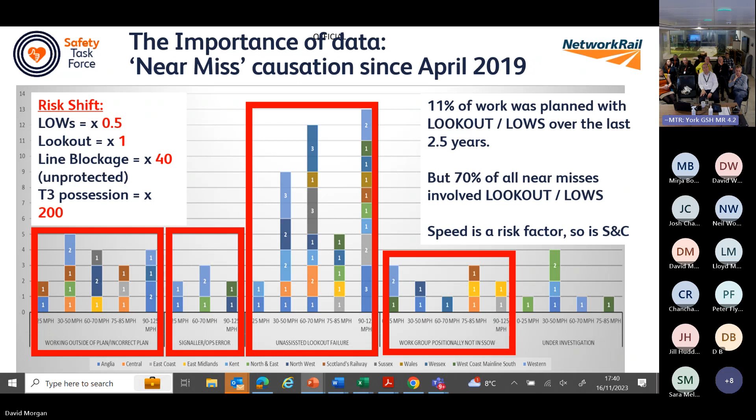11% of work was planned with lookouts over the last 2.5 years, and you'll see a change of how that's changed over the last few years under the programme that I've been involved in.

But this slide actually is probably one of the most important. I'm going to talk about track worker safety systems and the programme of what we've put into place, technology-wise, etc. But this is actually the most important slide that I've got, and it's to remove the need to be there in the first place. So whether that be we don't do it at all, or we do it less frequently, or we do it in a different way using technology.

So, for example, PLPR, plain line pattern recognition. We do the majority of our basic visual inspections on the East Coast Main Line, apart from S&C, by PLPR now. And then eddy current testing, we don't have to do the ultrasonic testing that we used to do manually for that, etc. So risk-based maintenance in all disciplines and how we do the right thing in the right place at the right time.

At the moment, we've been trialing use of drone technology, and I can see Joe's on the call there. Joe's our technology lead for train-borne and airborne inspection regimes. So we've proved the concept of doing S&C inspections by drone in York Section, and we're going to push to doing 3 out of 4 of our inspections of S&C using drones. There's the 153 coming online, which is a train-borne inspection for S&C as well.

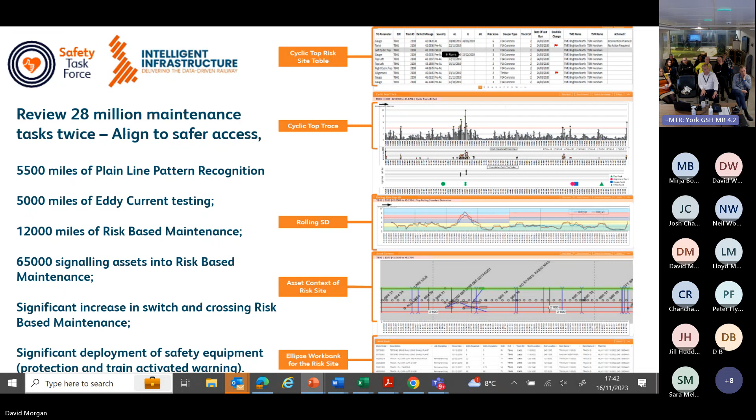So again, taking away the physical need to go and put boots on ballast is the most important thing. When I was given the track worker safety job and I liaised with Rob McIntosh as our regional director, he said, I want you to focus as much as you can on removing the need to be there in the first place.

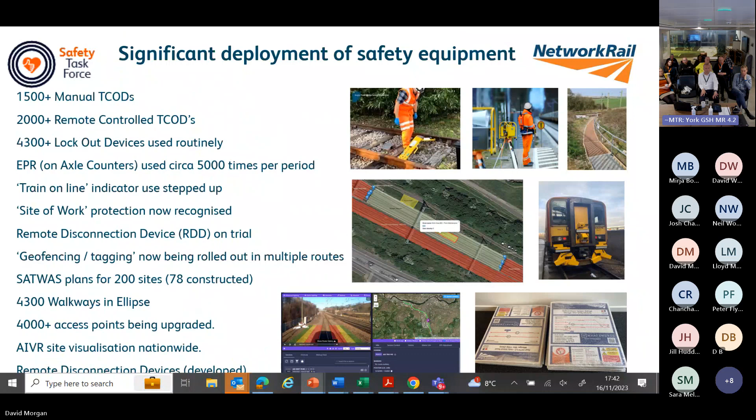So significant deployment of safety equipment through the time of the safety task force, and these are national numbers, deployed 1,500 plus manual TCODs, remote control TCODs, lockout devices, EPR, train online. There's a whole suite of things there, and I'm going to talk about them a bit later on about what those individual things are. So bear with me, and I'll tell you what they are.

But I refer back to the slide I talked about before about how many accidents were involved in the use of unassisted lookouts. So red zone working, as we call it, but be careful because we still do open line working, by the way. So SATWAS and TAWS and ATWAS are methods that you can work in an open line with trains running. So unassisted lookout working is where we had someone with a flag and a whistle that looked for trains, and when a train was coming, told their mates, there's a train coming, blew the whistle, get off. We started that in Victorian eras.

Just a question. So you said you've got 25% of the work, but 80% of the accidents associated with that work. Is that correct? So 20% of the accidents were not lookout related. That was situational awareness. I've got a slide a bit later on that shows a breakdown and a bit more detail on that. But 100 years ago, 120 years ago, that's how we warned our workforce of our trains coming. And in 2019, still over 25% of our work was done unassisted lookout. So that's where the 25% bit is, and you'll see the accident breakdown.

But the graph, as you can see, we have minimal amounts of unassisted lookout now. And the little bit of red that you can see on the bottom right map of the UK there was some of ours down at Peterborough. But since Chris Harrison went to Peterborough as the IMDM quite recently, we've almost eliminated unassisted lookout at Peterborough in the last 2 months as well.

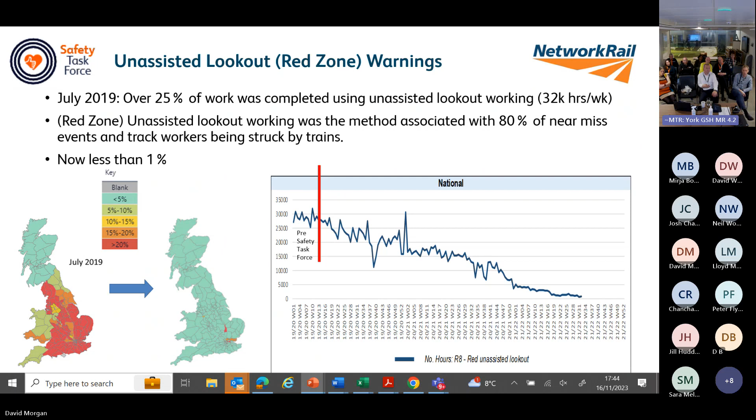And on East Coast Route, I'll speak for East Coast Route itself, we were at something like 12% additional protection on our line blockages. And by that is a belt and braces kind. So if the signaller makes a human error, you've got something else in place that protects. I've had to try and sell that to the signalling fraternity that this is not additional work for them. It's actually helping them not make a mistake.

And something Richard Owens used to say to us quite regularly in the early days when we were trying to push additional protection is that I wouldn't want somebody to make a mistake, kill one of their colleagues, and then have that on their mind for the rest of their lives. And you can imagine what that would feel like if it's your responsibility that you've made a mistake and somebody's been killed. So now on East Coast Route, we're at about 67–70% of our line blockages taken with additional protection. And I'll touch on some of the additional protection stuff shortly.

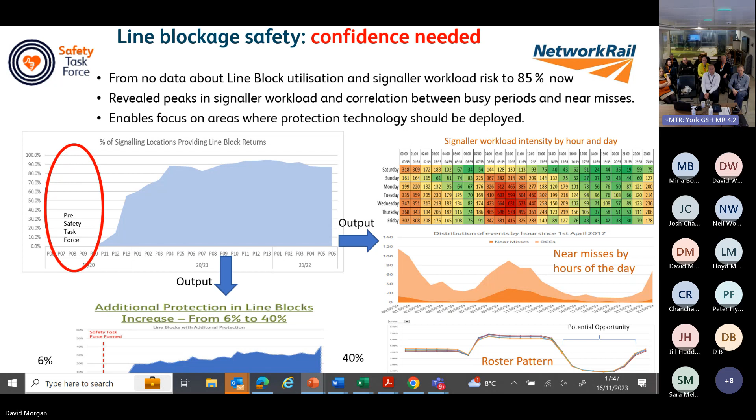Causation factors. I've got a couple of slides because there's other technology involved other than just the stuff for the track worker safety, which I'll come on to. Simplifying the 019 standard, what we're doing with COSS recertification. It used to be an online kind of thing, and our safety critical competences need to be assessed in a more rigorous way. So that's now back to classroom assessment. And funnily enough, we had quite a higher failure rate than we were having previously, where everybody was just doing it as part of their online assessments.

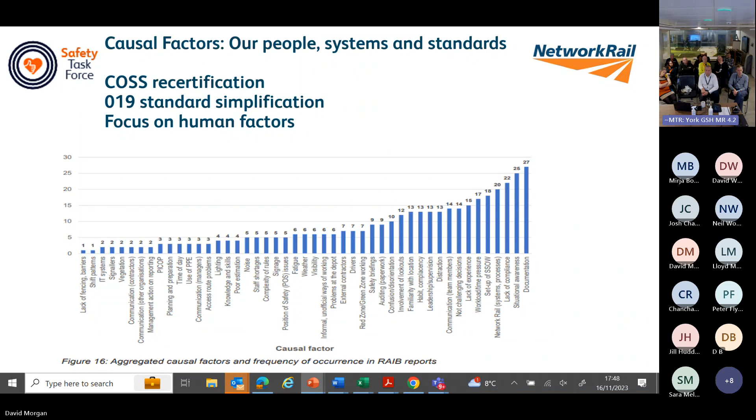There's a reason for that. I could pass something to my son who's never worked on the railway, give him a few books and he could pass that test. That can't be the way that we do safety critical competences. And then we've got some focus on human factors. So we've been doing things around IOS training, risk interpretation, all that kind of stuff. Lifting the skill level of our soft skills when you're a PIC or a COSS on any line, what responsibilities you've got.

So Rail Hub, and funnily enough, I am the route lead for the rollout of Rail Hub as well. This is an online system that does safe system of work. So it replaces the paper-based system. We get everything electronically, goes from PIC and planner, the section manager, and a check-in process, and everybody can do it electronically and remotely. But there's also the assurance and the check-in facility so we can look at what people are doing and how they're doing it more rigorously.

And we've successfully deployed that across the whole country now. Yeah, there's still a few teething issues with it. If you're an on-call section manager or engineer, in the early days you got lots of phone calls about the pack doesn't work, this doesn't, but we've ironed most of that out now. There's still an odd thing that comes up.

Could I just ask Paul to turn his camera off? That's okay. Paul, you've just popped up in the top right of the recording. I'm not sure you want a starring role.

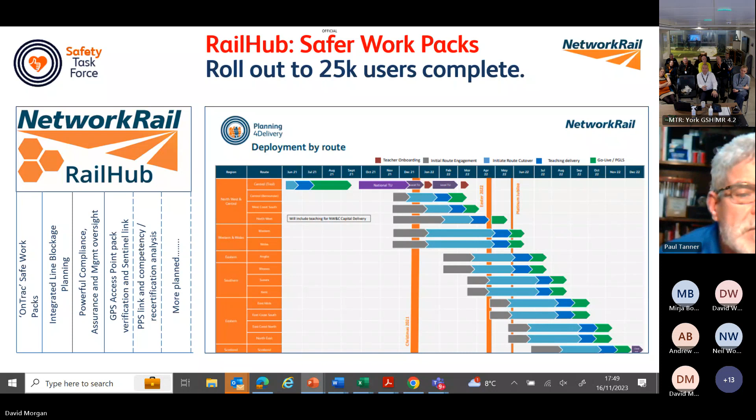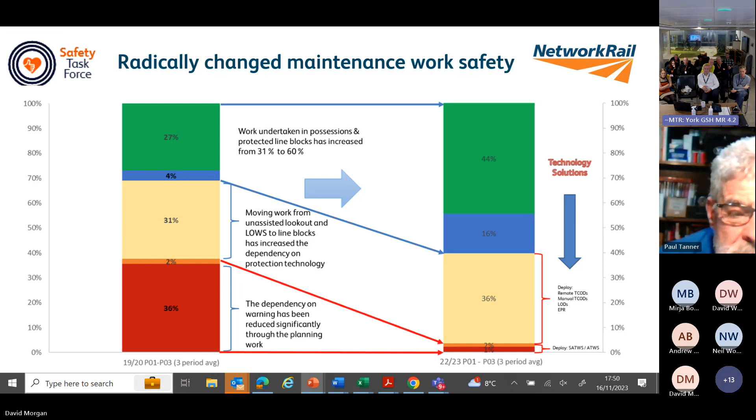So that's no safe system of work. So we still have a challenge of people going on the other line without a safe system of work. Sometimes it's by mistake and it's a situational awareness kind of thing. So, for example, we had a line blockage taken last week, correct line blockage taken in the right way, and then they accessed the track outside of their line blockage because the access point was defined outside the line block. So there's an investigation into that, but they've now been on the other line without a safe system of work officially.

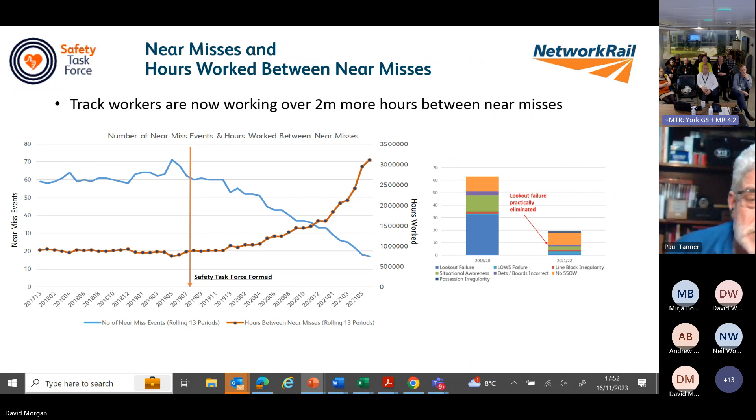Yeah, there's still been an odd occasion. We did have an EMS on my patch where we had additional protection in place, and there was an error of communication. That can still happen because there still is a small human element to that. But the ducks have to line up even more than they would in a possession. So they're few and far between.

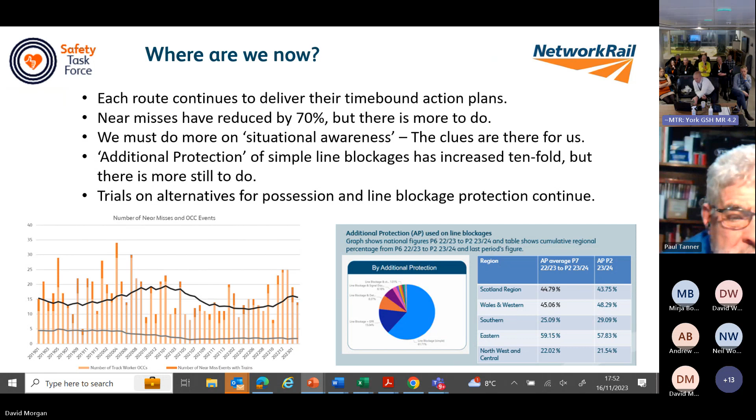So track safety equipment, going back to the slide where I talked about how many we've deployed, I'll go into a bit of detail about what they are. So there's two categories here, protection system and warning system. Protection system is for how we provide additional protection, and warning system is when it's an open line still. So protection system, T-CODs or track circuit operated devices. There's two types of this.

So there's the conventional T-COD, which is basically 2 clamps and a bit of wire in between them. You put them on from one rail to another, clamp it on, and it drops the track circuit. We use that predominantly now as on-site work protection. So if we are working between A and B and we're in this room, that's the length of our work site. If I place the T-COD on the track here where I'm standing, it drops the track circuit of where I'm standing, and the receiving signal changes to red.

And obviously a train can't come because of the track circuit, it's as if a train is on this bit of section, so another train can't come. There's a bit more science to it because you have to be able to drop the track circuit. It doesn't affect the level crossing. Does it affect the adjacent road, turnout loops, all that kind of stuff? So we need to know that we're dropping the track circuit in the right way. Well, this was a development where we deployed 1,500 plus of these.

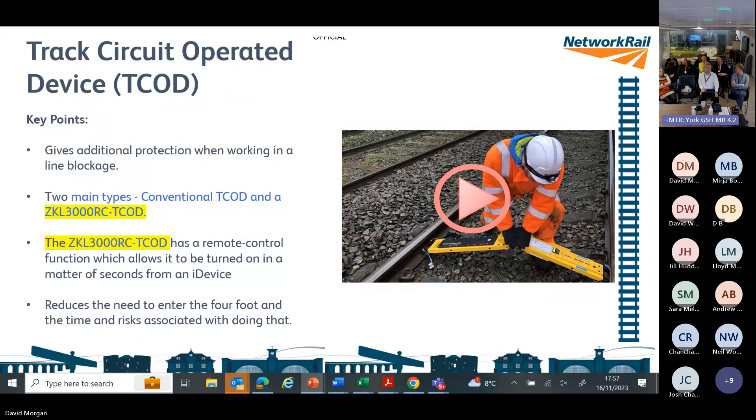So that's T-CODs and conventional T-CODs. That's just what I've just explained, to be fair. So the next one is the engineer's possession reminder. I used to be a COSS for a long time, and then I didn't use it, and it was hard to keep hold of the competence.

And you know, when I talked about my 5 years on secondment, one of the jobs that I was asked to do was going to check on where we had speed restrictions on, which meant I had to go back out on the track again by myself generally. So I had to go on the IWA course, and I learned about EPR, because I've been a COSS for like 20 years, and done my online assessment and passed it every time. Then I went on the course and they started talking about EPR, engineer's possession reminder, and I didn't have a clue what it was. So that's the danger of doing online assessments. So I learned when I had to redo the courses in IWA what it is.

So it's in axle counter sections, and a signaller puts a reminder appliance on their panel that is belt and braces. So when a signaller wants to hand a bit of track back to traffic again, he has to knock EPR off first, then knock the signalling system back. So he has to do 2 things. So there's a belt and braces. But it's still a human interaction of one individual.

So in places where there's more than one signaller, when you put EPR on, the second signaller has to confirm that it's been put on and that it's taken off again. So there is a belt and braces, but in some of our little boxes around the patch, sometimes there's single occupancy, but they have to write it in the register, etc. So it's a similar thing, but it's used in axle counters.

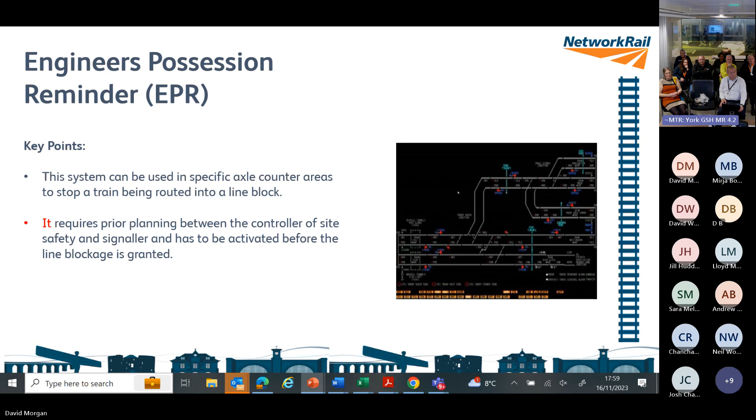But in my experience, we generally make it that intrusive that they become useless, because when you want to take the up and down main and that slow and that patch and that one, how are you going to get that during the day? Because we need to run trains. So the lockout device then drops everything, so you can't use it.

So at initial design stage, and I've been talking about York Station, the third road coming out of York Station, and about the additional roads that we're putting in at Darlington Station. When I have the early development discussions with project teams, I talk about what our track worker safety system's going to be. And if we're putting lockout devices in, can we talk about what it locks out? Can we make them useful?

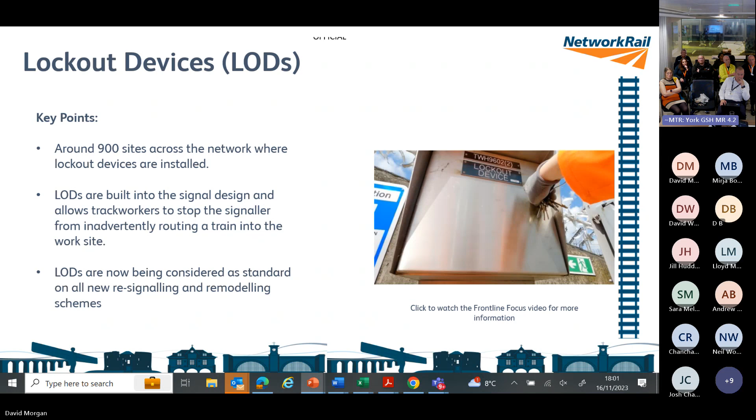Because it costs you a lot of money to put them in, and then we don't use them, and then the signalling fraternity go, why are we spending zillions of quids on putting all these things in and nobody uses them? Because they're useless, because they're too intrusive and we can't use them. As it says on the bottom, considered as standard on new re-signalling and remodelling schemes. That's our starter for 10 now, but we've got to make them useful to make them worthwhile putting in. Otherwise, the frontline staff can't use them.

So warning systems, this is for open line working. So, you know, I said red zone, people get red zone and green zone confused. All terminology, I do appreciate, but we still do open line working, and this is how we do it. Semi-automatic track warning systems, or SATWS. Anybody that knows me, that knows that I've been involved in the track worker safety programme for the last 5 years, they'll have heard me say this.

This is the most frustrating project I've ever been involved in in my life, because we've been on it for 3.5 years and we still haven't gone live with it. So we had the rules of engagement, we did that, ticked that box. And this is always the case when you're leading from the front and you're the first person doing something. You find out the problems, then you've got to solve the problem, then you get the next problem. So when you say we're playing a different ball game, we're playing a different ball game on a different pitch in a different country now than when we first set out with this.

So it is very similar to axle counters and things, because we have triggers and we set axle counters at a safe distance away from the site, so that when a train passes over it, it gives the system a signal to say there's a train coming, and you get a warning bell on site. So there's lots of design that goes into what those distances need to be and where you need to put them, but there are some of the hoops that we've had to jump through.

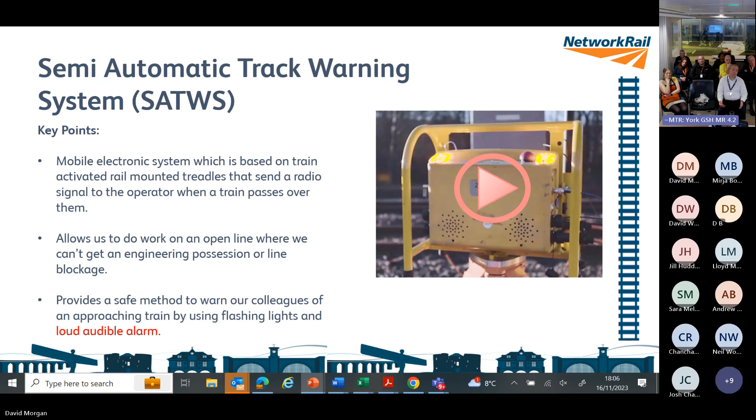We haven't been through the dreaded SRP or MSRP yet. And because nobody else has done this, we know it's going to be a bit of a challenge. But that's a massive game changer for response to faults for all parts of the industry, of how we can actually go on an open line in a more flexible way than we do today.

So TOWS. What's the difference between TOWS and TAWS? That's a question to ask. Anybody know? O and A, that's it. So it used to be TOWS, which is track operated warning system. TAWS, train activated one. There's no difference. It's exactly the same, right? But it's a really expensive system. It usually costs us over £1 million to put a TAWS site in, or TOWS as it used to be, which is why we don't do it.

We do have it in lots of places existing. So on my patch, quite lucky around Bradbury Curves and Newton Aycliffe, Durham, we've got TOWS already. Use it all day, every day. It's the simplest system since time began. You switch it on, it gives an intermittent beep, beep, beep. You can go on. If it goes beep, you get off. How hard can it be? There isn't even a competence for it. You learn about it on your PTS. That's how easy it is to use, but it's expensive.

So we've trialled a site north of York between Skelton Bridge and Beningbrough, an overlay system where we've used the existing signalling system, got the design, our NRD group to help us with this. And we were hoping to get it for around 200 grand. It's actually cost us about 350 for the first one, proof of concept and all that kind of stuff.

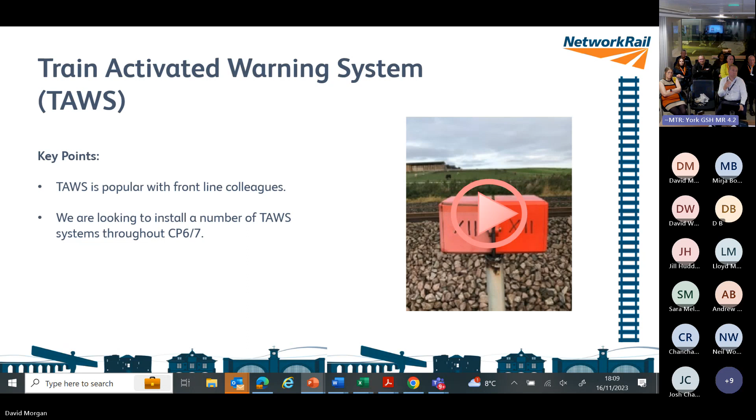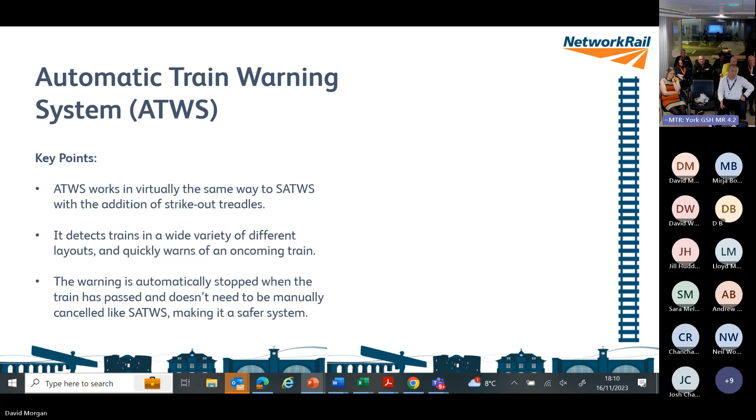So just before I come on to this one, RDD, I said I would mention that. So that's remote control disconnection device. So the T-COD, I showed you the picture placed in the four-foot. An RDD is a similar bit of kit, but it goes in the location cabinet and you remotely press it on your iPhone and it drops the track circuit in the cabinet rather than on the track. It's cheaper and there's no ongoing costs. But there's been teething troubles with that as well. They've been trialling that on Wales and Western, and I think we're over all the teething troubles.

Dave Allen, who's part of the National Task Force, must have told me about 20 times now, it's close. So it's Christmas and next Christmas and the Christmas after. But he assures me that it's really close. That also allows us to take possessions and things. The other one that I didn't mention, which we use as additional protection, is disconnection. And I'll explain that a little bit.

So again, we've led from the front. Martin Errington's worked closely with Adrian Moss, who's now in our regional signalling team. And we used to have equipment up the North Main Line, associated with all the signal boxes up the main line, signal boxes at Alnmouth, et cetera. So what Martin and Adrian have worked on is replicating that in the signalling system back at Tyneside ROC. So we can have the CCTs on a desk at Tyneside ROC and they can give a disconnection anywhere on the Newcastle patch at any time. And we've got CCTs in situ 24 hours a day.

Send an individual out in the dark by themselves on a line that's running at 125 miles an hour. So if they're in the wrong place, they're in an open line in the dark by themselves at 125 miles an hour. And we've had numerous examples of that being the case, because boards have been hit or dets have been run over. And we have had accidents where people have been involved and killed by placing protection in the wrong place. I think it's been one of our biggest.

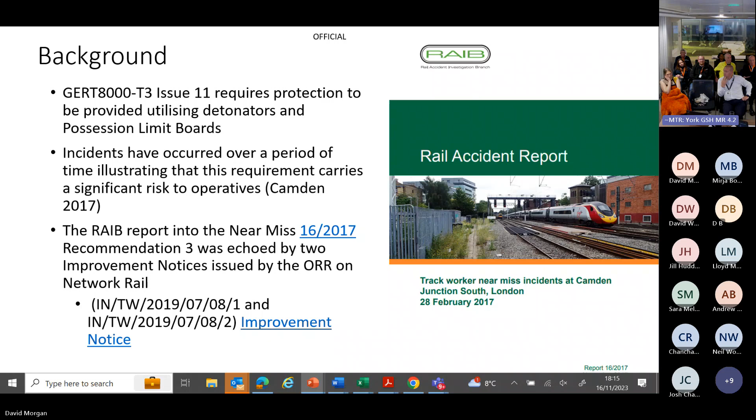So that's why the Camden recommendations were about how are we going to get rid of people having to do that particular activity. And that was a near miss 16/2017 and an improvement notice served by the ORR. So the ORR have been all over this as an activity that isn't a safe thing to be doing. You know, where we talked about earlier, people being in the wrong place at the wrong time, that's an example of it, because they've had a safe work pack to go to the right place to do the right thing, but they've been in the wrong place, trying to do the right thing and placed it in the wrong place.

So there was some research, because we have had challenge from the unions about you can't get rid of dets. So do the drivers actually hear them? And if they hear them, what do they think? Track workers: so I have a possession from Benton to the border, 70 miles long, and I place protection at the 2-mile post and the 70-mile post. How far away do you think my workers are working from them dets? They can be miles away from them. So they're never hearing that the dets have gone off if a train's gone through them. So who are they actually protecting being there in the first place? And then the research paper concluded that as a secondary risk control, PLB effectiveness can be influenced by a number of factors.

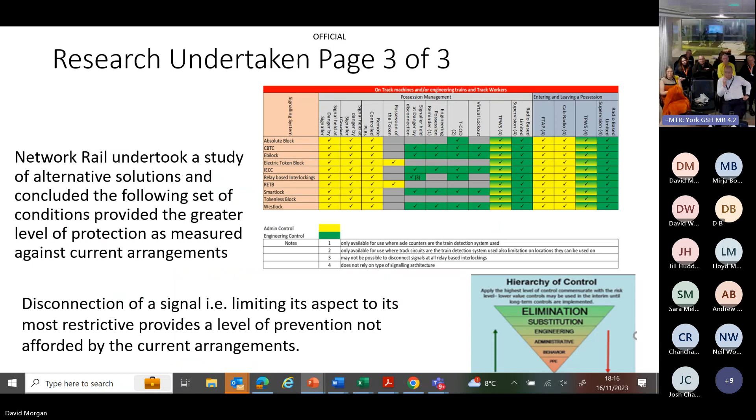So what we wanted to do was to remove the use of the detonators. Originally we started talking about using TPWS, the train protection warning system that's fitted to the signalling system. And we tried this in Doncaster, and it wasn't conclusive in any way, shape or form. So we then had a look at what the alternatives were, which is when we went to disconnection. So back to my friend in the CCT, they can do any remote disconnection across my patch at the minute. So we can just ask the CCT, the possession's between A and B, drop track circuit C and D, that protects that possession. So in the hierarchy of control, everybody's agreed through the risk assessment that that was the right thing to trial. So that's the basis of the proposal.

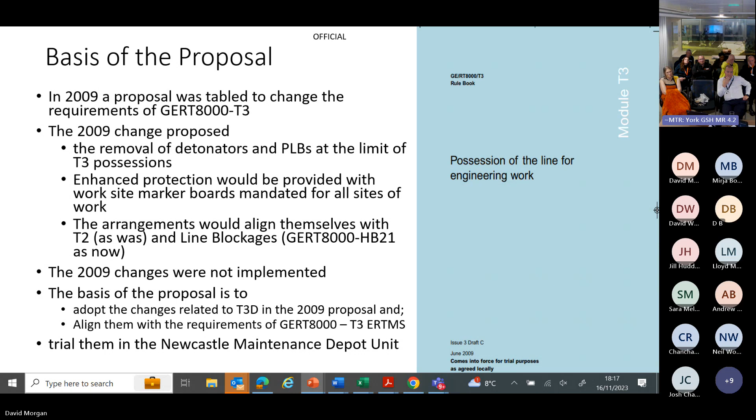And then we said that this has been talked about since 2009. But after we'd had a series of near misses on our patch, I pushed and we got in touch with Emrys Warner, who had this body of work that was happening in the background already through technical authority. It just needed somebody with a bit of push to want to do this. And Martin Errington, who's the IME at Newcastle, was the guy that wanted to do it. So we did that, did the risk analysis, talked about the rule changes that were trialled at London Bridge, and then we said we'd do a trial at the north of the East Coast Main Line.

The trial consisted of 3 different levels. So we talked about a simple possession that had no machines or anything in it. Then we talked about taking a possession around a machine. Then the third phase was taking a possession, bringing a train into the possession and taking the train out of it. Because obviously before they used to approach the PLB, so we've put process in place of how we control movements into and out of possessions. So we've done all 3 versions of that. Everyone that's been involved in it has given positive feedback.

So we initiated the trial and we've used Morpeth, Alnmouth, Tweedmouth and Edinburgh ROC, because when we take our possession of Marshall Meadows, it actually affects the signalling in Scotland as well. So we had to bring them on board.

That was tricky the first week we did it, because depending on how well they brief their end of the chain, the gaffer that's on duty the night that you turn up goes, I don't know anything about it. And we had that, but we had the right people on nights when we were doing the trial to ease the pain, and we got it over the line.

It was that successful. We've extended the trial to the whole of the Newcastle ROC area. By that, what I mean, from Northallerton to the border is what Newcastle ROC covers. And because all the signallers and the operational team in Newcastle ROC had been briefed for the trial north of Newcastle, they thought that the risk to extend it to the whole of Newcastle ROC was zero. So that's what we've done.

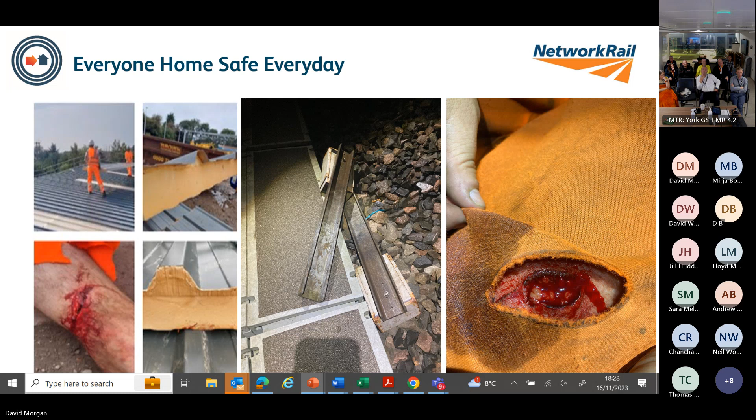That was it. Questions? Thanks, Dave. Are you winning the attitude problem? So am I winning the attitude problem? Slowly but surely, I think.

We had an interesting conversation today in the safety culture workshop about PPE, for example. And those that have been on a really long time will know you didn't wear PPE at all. Then we went to that mini vest. And I used to love the renewals when I used to work on the renewals because the guys used to wear it around their waist, shirts off, all that. And they used to say it's because I'm always bending over, you can see it more when I'm bending over. To full orange that we are now.

The PPE equipment that we supply to our staff now is second to none. Boots are tremendous. I used to buy my first pair of boots for £6 off this van that used to come to the depot. And they used to knock your feet. And they were only comfortable when they were ready to change them to the next pair. The pair that we get now, £100 a piece or more than that.

But then we moved to hard hats. I remember when we introduced hard hats, and that was a nightmare trying to get people to wear hard hats. But very rarely will you go to a site now where you don't see the people with the hard hats on. The next one is glasses and gloves. But glasses are my biggest bone of contention.

The reason I'll explain: if you fall over and break your leg, generally it fixes and mends and you can walk again. A bit like them two individuals that we've got there. They will be better, I suppose. But if you get something in your eye, you lose your eye, you've lost your eye. There's no coming back. And we've done campaign upon campaign of trying to get people to wear glasses.